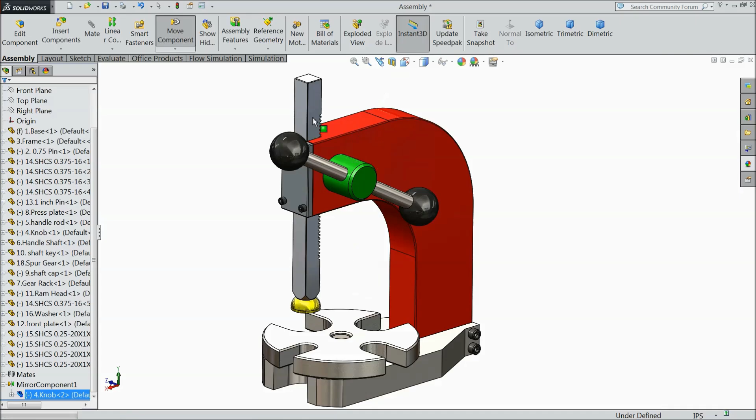Here we will make the first part, the base for our arbor press. We will select the top plane, sketch, draw one construction line and make sure it passes through origin. Select line, connect with this, exit. Now we will assign the dimension.

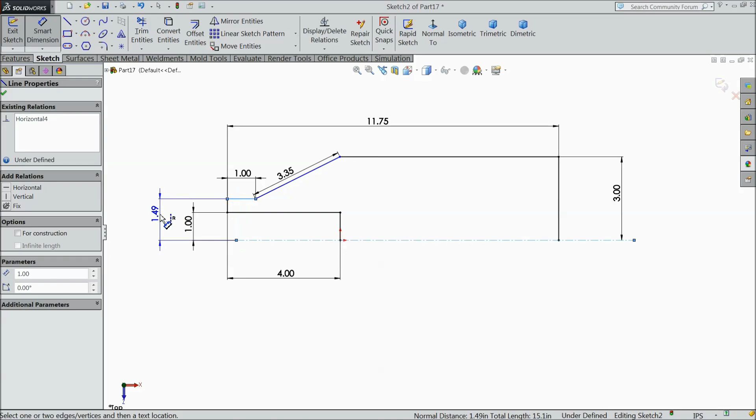Our dimensions are in inches: make 1 inch, 4 inch, 3.35 inch, and the distance from here to one end 11.75 inch, and the distance from here to this line 3 inch, and the distance from this point 1 inch, and this distance 1.5 inch.

Okay, now select circle and draw one circle here. Select a line, connect with this line, exit. Now choose trim entities and trim this portion.

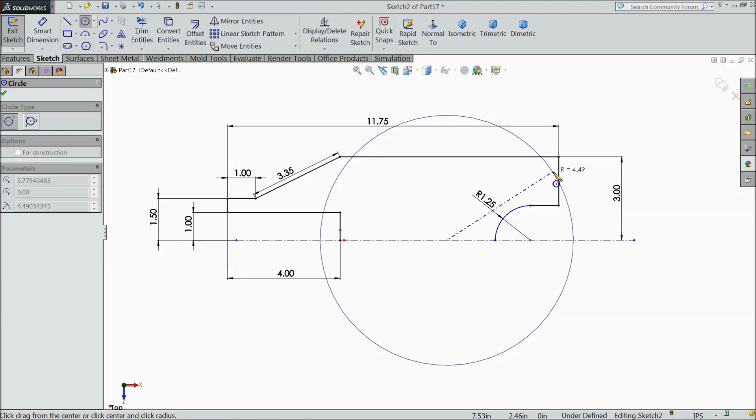Select trim entity and delete this line also here. Okay, now select circle and draw one more big circle, or cancel it and choose here center point arc. Now draw an arc from here, exit. Now assign dimension: the gap between these two 2.5 inch, and keep the radius 4 inch.

Now trim this outer part. That's it. Now select all the geometry, select here mirror and select this line, and we want to make it mirror, so select OK. Now this body is going to be mirrored.

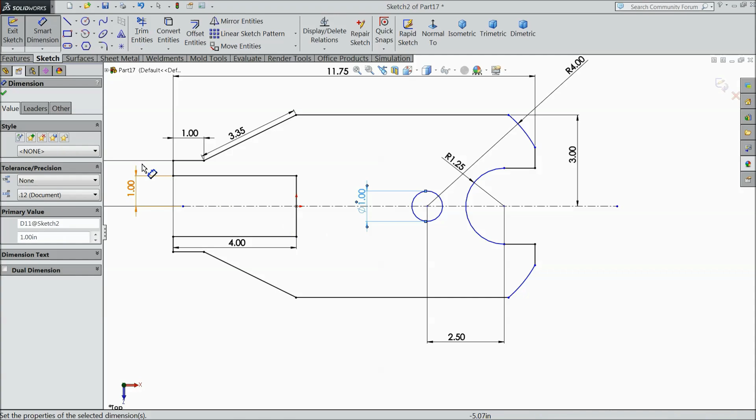Select circle and draw one circle here and make the diameter 1 inch. Now this distance from here is 1 inch. Now our geometry is fully defined. Select extruded boss and extrude up to 1.5 inch.

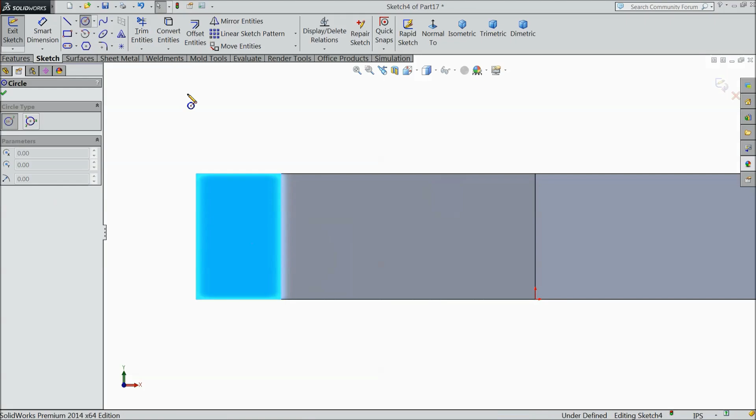Now select this face, sketch normal, and here we want to create some circles. First draw a center line. Now let's assign this circle: 0.35 inch, and the distance from here 0.5 inch, and the diameter keep 3/8 inch.

Select mirror entity and mirror this circle about this construction line. Now select extruded cut and select here through all. See. We will select some chamfer, 0.01, select this face, this face.

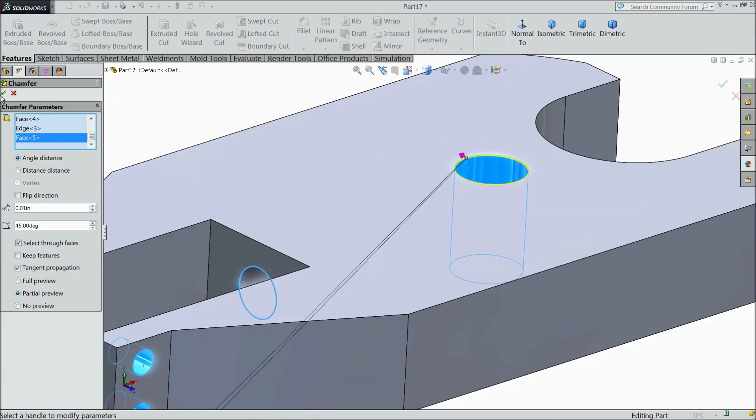Okay, now our first part is ready, this is the arbor press base. We will assign some material, let's do it, brushed steel.

Now save as. Go to desktop and create a new folder and name it arbor press. Arbor press machine, and save as first part base. Okay, let's go for the next part.

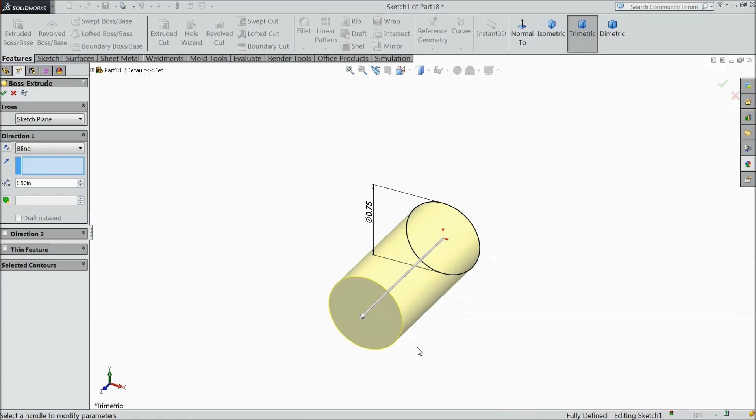Now we will sketch a 0.75 inch pin. We will select front plane, sketch, and draw a circle and keep the diameter 0.75 inch. Extrude it up to 1.5 inch, and make chamfer 0.05 inch and select both ends. Let's assign polished steel for the whole body. This is the pin for the arbor machine.

Now save as .75 inch pin. Okay, let's move to the next.

Now we will sketch the arbor press frame. Choose front plane, sketch, select a line and start from origin point, now exit. Let's assign the length and height, everything.

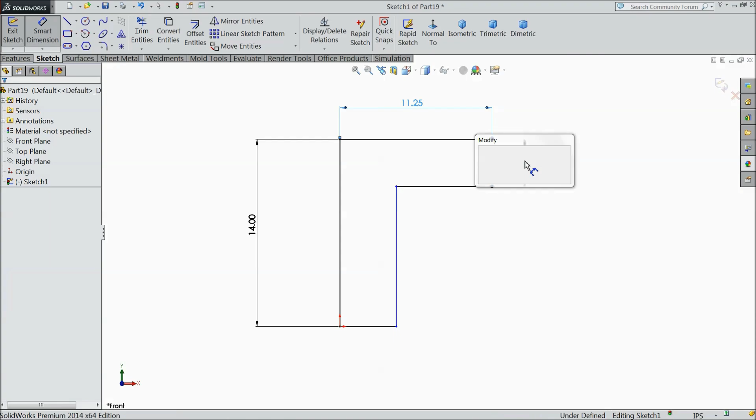Keep 14-inch height, 11.25-inch width, 4-inch width, and here also 4-inch. Now choose fillet, keep radius 6-inch and select this end. Now change to 4-inch and select this end. Select circle.

Draw a circle. Select center point and connect it from midpoint. Exit. Now select this midpoint and make relation horizontal. Keep the diameter of hole 1.63 inch and the distance from here to one end 1.686 inch.

Now select extruded boss and choose here mid plane and extrude up to 2 inch. Now select this face, sketch. First draw a center line.

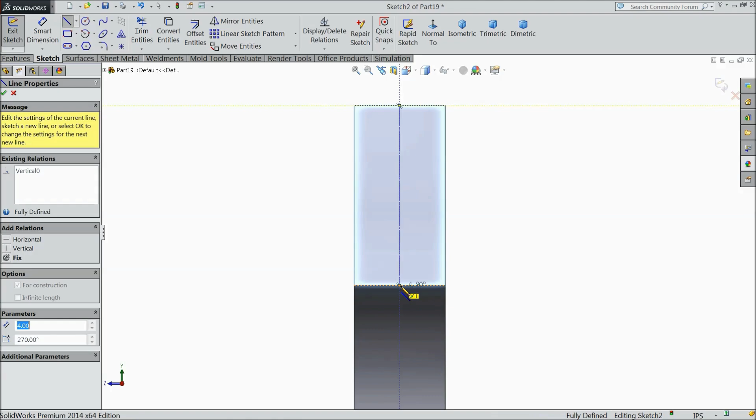Exit. Now choose corner rectangle and draw one rectangle. Exit. Now select these 3 lines and make relation symmetric. Assign the length 0.01 inch and the distance from one end, by default 0.5 inch. Select extruded cut, we want to cut inside up to 1.01 inch. Now see here.

Now we want to create some holes here. Select this face first, normal, and choose hole wizard. Here we want to create some hole, so choose straight tap, inch, and this tapped hole. Here we will select 1/4 into 20 size hole and choose blind and select 0.

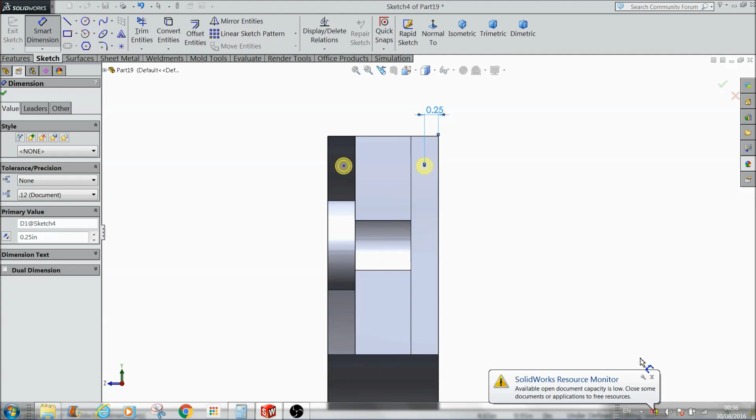Blind inside select 1 inch and this one select 0.75 thread. Okay, now choose position. Here we want... okay, now escape, press escape, assign dimension: 0.25 inch and this height 0.5 inch.

Okay, now the same as here also: 0.25, 0.5 inch. Now select this face, sketch, select center line, exit, and we want to mirror this hole to another direction. So select, sorry, exit.

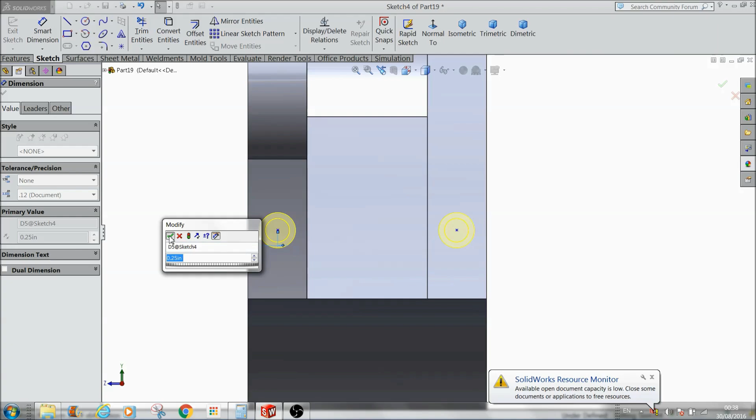Delete this line, or no problem if you can keep it as it is. Mirror it. Or we will do one thing, just delete this line and edit this feature. Now go to location, and draw two more here, press escape. Assign the same dimensions: 0.25 inch, 0.25 inch, 0.5 inch, 0.5 inch.

Select OK. Now see the 4 holes here we created. Now the same as we will create here, select this face, sketch, normal. Only select this face and choose hole wizard. Now choose the same straight tap, inch tab, and here select a little different, 3/8 inch, 3/8 inch 24. Choose through all. Here select through all, position, escape.

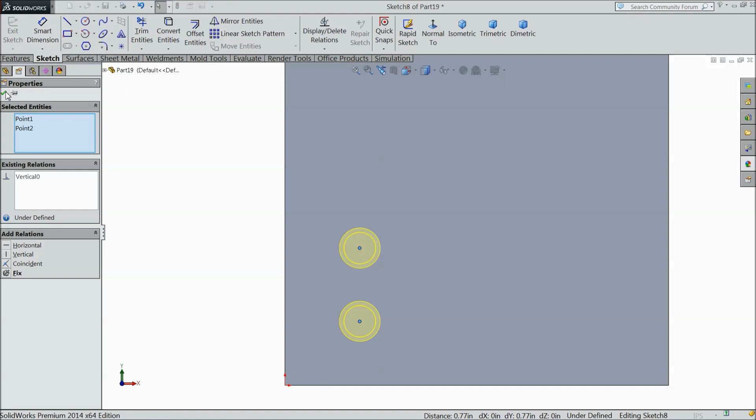Now let's assign dimension. First select this center point and this center point, same vertical. Now assign the distance from this point, 0.5 inch, and the distance from here to here, 0.35 inch, and this distance 0.8 inch. Something went wrong, that's why this pop-up coming. Select OK. Now see the holes created here.

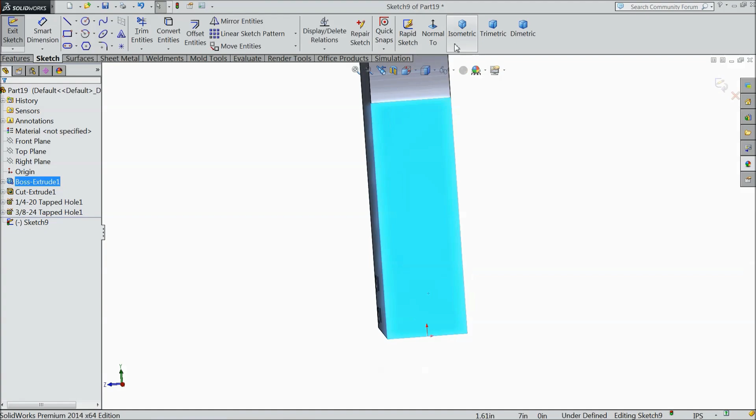Now we want to create a hole here. Select this face, sketch, normal. Select circle and draw a circle. Connect one line with origin point. Select this line and make sure it is vertical. 0.75 inch, and the distance from bottom line 0.75 inch. Select extruded cut up to inside 0.75 inch.

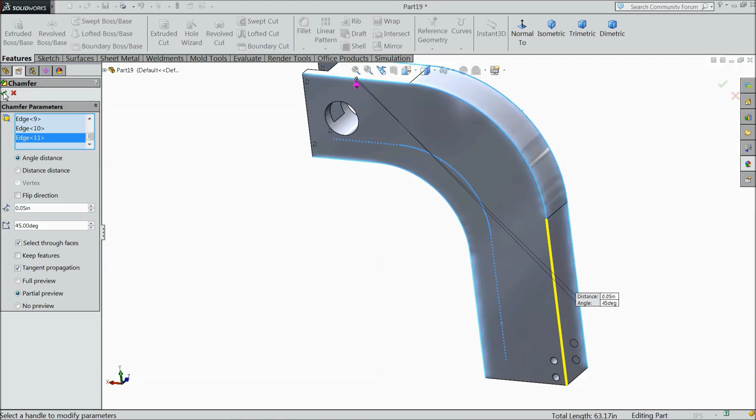Okay. Now choose chamfer, select 0.05 inch and select this face, this face. The same as opposite direction. Select OK. Now this is the frame for arbor press. Let's assign the color. Select the body. OK. Now this is the press. Now save as frame. Okay, let's move for the next part.

Now the next part is handle knob. So choose front plane and draw a circle. Actually select center point arc and draw a half circle. Exit. Choose line and connect it and assign the radius 1 inch. Select revolve boss base and select this line as an axis.

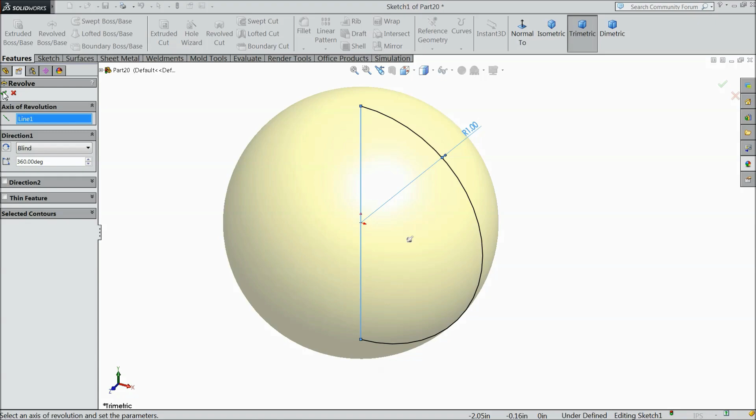Okay. Now again choose front plane and we want to create a plane, so select this upper face. It will be tangent to this face. Now select this plane, sketch, and draw a circle here and keep the diameter 0.75 inch. Okay, and extrude up to inside 0.75 inch. Now hide this plane. Now we will assign black high gloss plastic for this knob. Now save as knob.

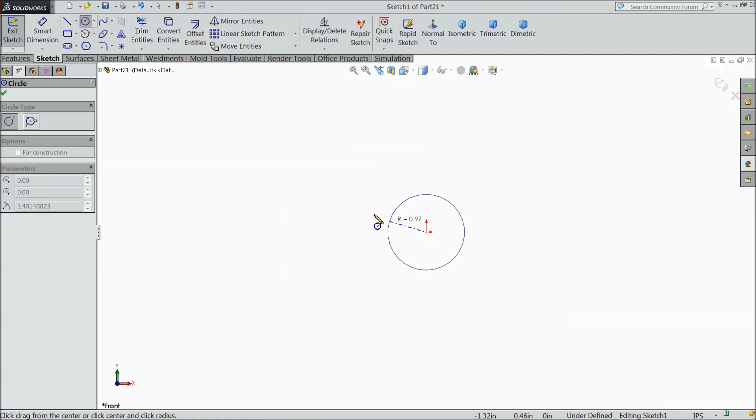Let's move for next part, handle. Let's make handle rod. So choose front plane, sketch, and for rod create a circle and keep the diameter 0.75 inch. Okay, and let's extrude and choose mid plane and we want a 10-inch long rod. Okay. Now save this rod. We will assign some metal finish. Okay, polished steel or brushed steel, better. Now save as part number 5, handle rod.

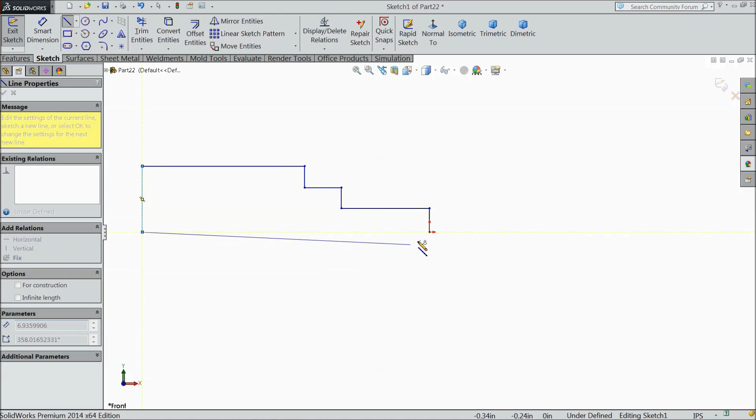Okay, let's move for the next part. Now we will make handle shaft. So choose front plane, sketch, select a line and start from origin point. And connect it again up to origin, exit. Now let's assign the height and width everything. Make 1 inch, 2 inch, and this 0.51 inch, 1.52 inch. This height 0.375 inch, and this height 0.625 inch. Okay, now our geometry is fully defined, so select revolve boss base.

Okay, now choose chamfer 0.125 inch and select this end. We need one more chamfer 0.05 inch and select this end. You can choose fillet 0.015 and select this inside circle. Okay, now again choose front plane, sketch, and here we want to create a hole, so draw a hole and keep the diameters 0.75 inch, 0.75. Okay.

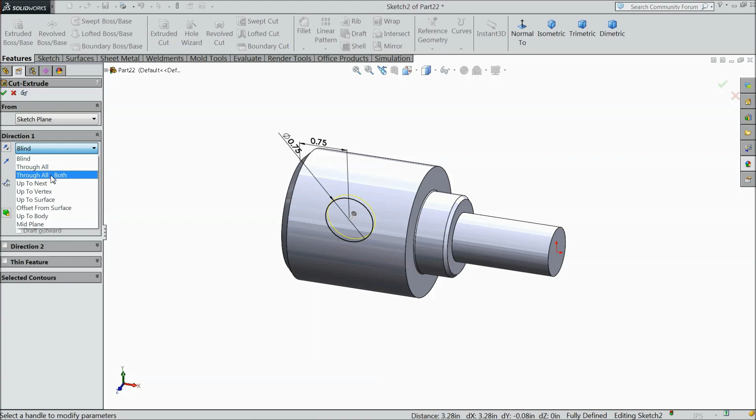Select the hole center point and origin point and make a relation horizontal. Now select extruded cut, and here we will select through all both. See, okay, now the hole is created. Now we will select front plane, choose plane and select this axis, make parallel. Okay, now here we want to create a slotted key, so choose OK.

Now select this plane, sketch, normal. First draw a center line up to this line. Now select here a straight slot, make one slot. Okay, now select this outer line and this slot, this tangent. Now we will define the length, 0.8125 inch, and this radius 3/16 inch. Okay.

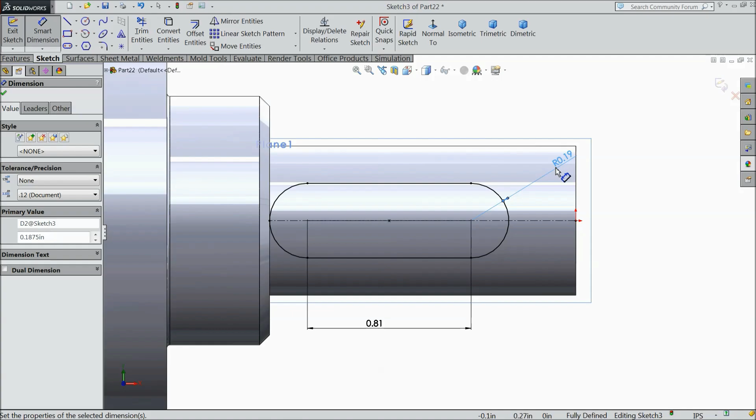Now select extruded cut, 0.9375 and direction 2 also the same, 0.9375 inch. See, it is actually 0.09375 inch. See, you can see it here. Okay, now see this, this is actually slot for key. Now choose fillet 0.015 and select this circle. Okay, now hide this plane and we will assign some color.

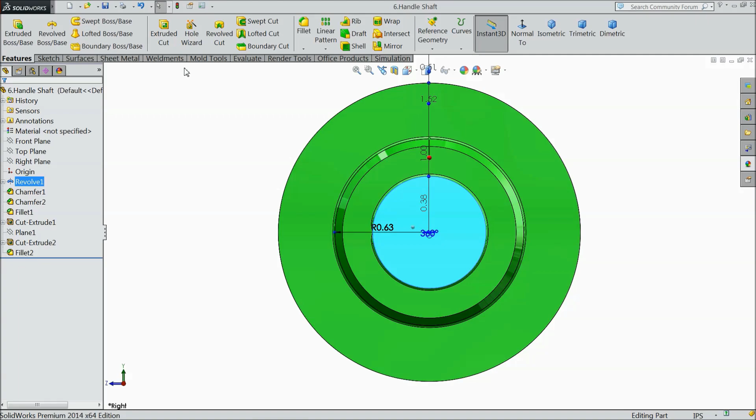We will do some editing here on this extruded cut. Edit, select this radius, and divide it by 2. Exit. Now see, this is our small slot, not that big. Now save as.

Now our handle shaft is perfect. Let's move on to the next part.

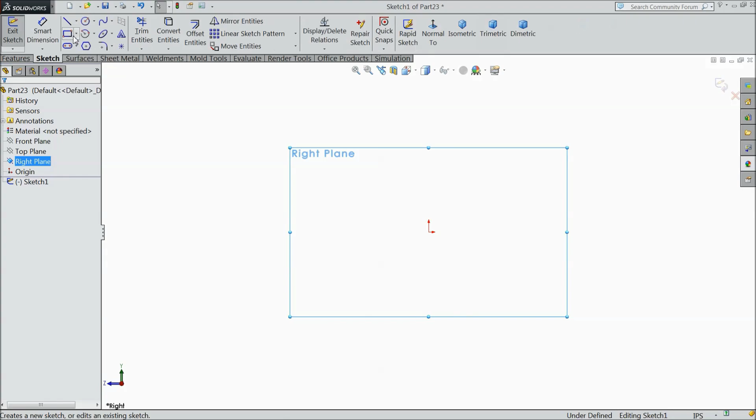Now we will sketch the gear rack. Choose right plane, sketch, select center rectangle and draw one rectangle, keeping length, height and width 1 by 1 inch. Select extruded boss, and we want length up to 10 inch.

Select OK. Now choose chamfer, 0.03, and select all 4 faces. Okay.

Now select this face, sketch normal. Here we will create some gear teeth.

Choose a line and connect up to here. Select center line, exit. Now select these 3 lines and make relation symmetric.

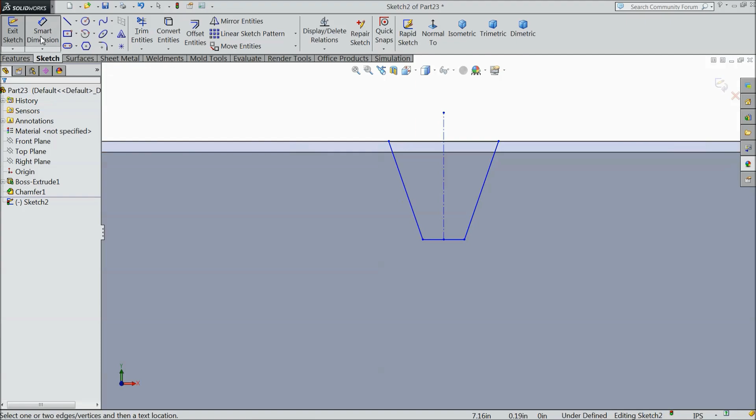Now let's assign some dimensions. Height, make 0.1416, angle 14.5 degree. Okay.

Choose radius 0.02 and select this end and this end. Okay, now this is selected.

Now geometry is not fully defined, so we will add some more relation. This point to this point, make sure it is horizontal. Now let's assign the gap.

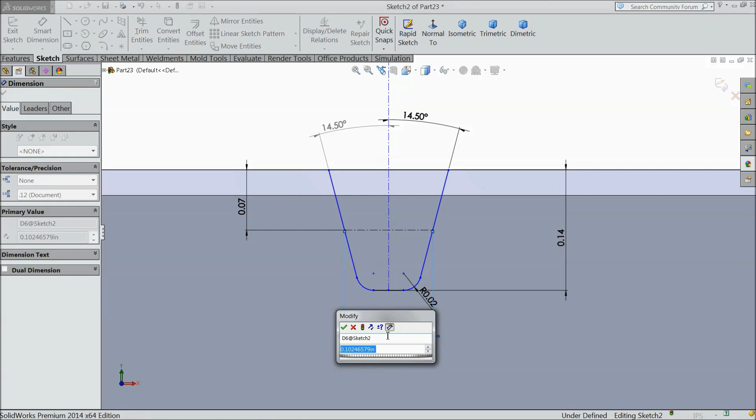Zero point 0.0708, and the length keep 0.1079 inch. Select OK.

Now assign the distance from here to the last point, keep 2 inch. Now our geometry is fully defined.

Select extruded cut and choose through all. See here, okay.

Now select this last cutout and choose linear pattern. Select this as an axis. Assign the distance 0.19635 inch and total 41 number of threads we want.

See, there is a small gap between two threads. Okay.

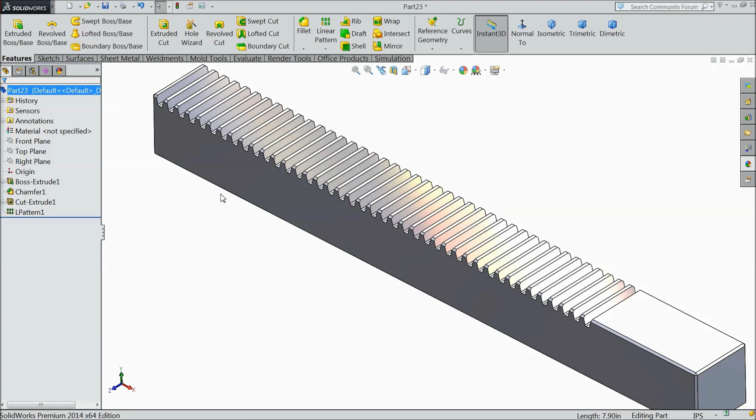Now we will do one, then select this face, sketch, only select this face. Here we want to make some hole.

Go to hole wizard, choose hole, fractional drill size 9/16, and blind keep 1 inch, select midpoint. Okay. Now see, the hole is created here.

We will do one more editing. We will just increase the length here, up to 12 inch. See, okay.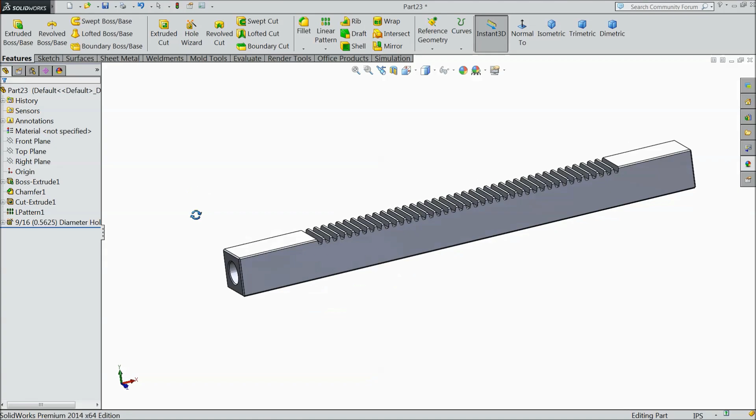Now that's okay, fine. Now select this face, normal. No, select top face, normal, hole wizard.

Choose straight slot and tapped hole and size 1/4 20 inch. Go down, and end condition choose up to next.

Select position, make sure it is parallel to origin point, just escape and choose dimension, 0.5 inch. Select OK.

Now choose front plane, sketch normal, select a line.

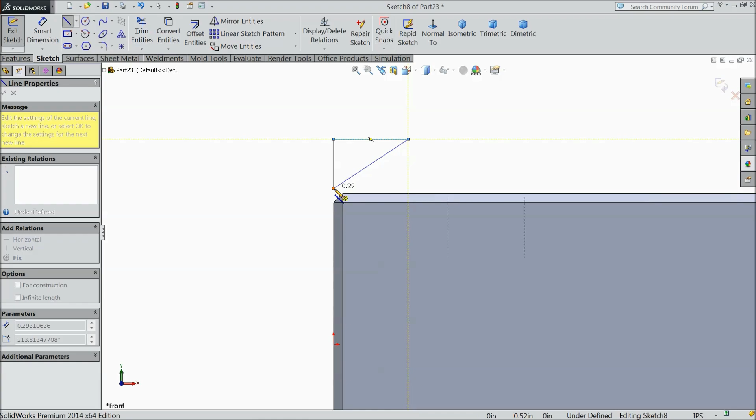Now select this line and this point, or better, drag down, make this relation, draw one center line.

Now assign the angle between these two lines, 30 degree, 0.2 inch. Now select revolve cut, this line selected as an axis. Okay, now see, it is created.

Now just select chromium plating. See, this is the gear rack for the arbor press. The press will move up and down through this gear rack. Now save as gear rack. Okay, let's move on to the next part.

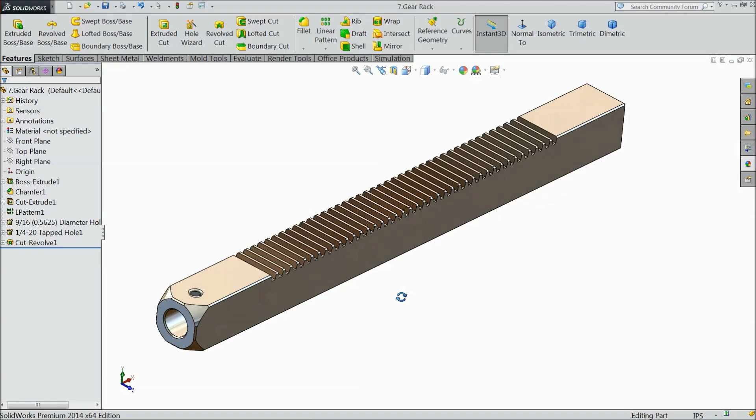The next part is the press plate. So choose top plane and draw two circles. Keep the inside circle as construction geometry. Now assign the diameter, outer diameter 8 inch and inside 5 inch. Okay.

Now select line, construction line. Connect one end to this end. Make sure it is construction geometry, the same as horizontal also.

Now choose circle. In every four corners define different size of circles, each with a different dimension. This circle keep diameter 2.5 inch, 2 inch, another one 1.5 inch, and this last 1 inch.

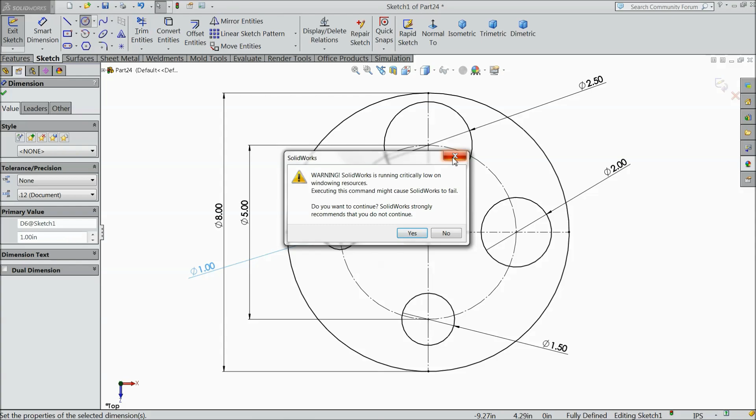Okay, and define, select circle, yes, draw a circle at midpoint, and this also keep 1 inch.

Okay, now choose a line and select this point and connect with it. Choose mirror entity, select this line and mirror about this line.

Okay, now here also draw a horizontal line up to this circle. You can mirror or you can sketch also by line.

Here also we will do the same thing, and the last one at the bottom. Connect with the circle and select both lines and click only mirror entities. Now see, it is automatically connected.

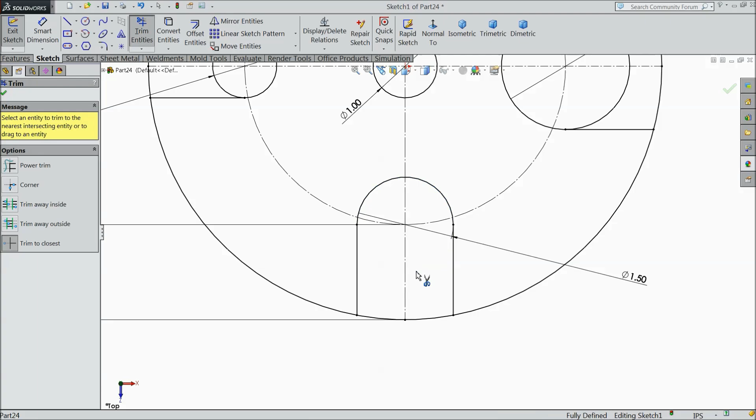Now choose trim entity. We are going to trim all the unnecessary things, we don't want this all. The same as upward. Okay.

That's it. Now select extruded boss and extrude up to 1 inch. Okay.

Now define chamfer. Select upper face and bottom face. Okay.

Now we will assign some material, cast stainless steel. This is the cast stainless steel.

Now save as part number 8, press plate. So this is the press plate. We will see how to assemble it during assembly.

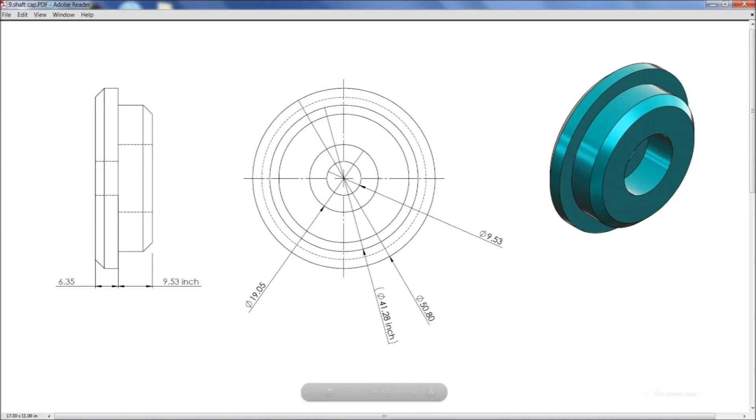The next part is the shaft cap. So choose front plane, sketch, select a line and start just below the origin point.

Exit. Now let's assign the dimension. First draw a center line, a horizontal center line. Make sure it's horizontal.

Now overall length 2 inch, this length 0.375 inch. Now this length defined 0.75 inch, and the last one 1.625 inch.

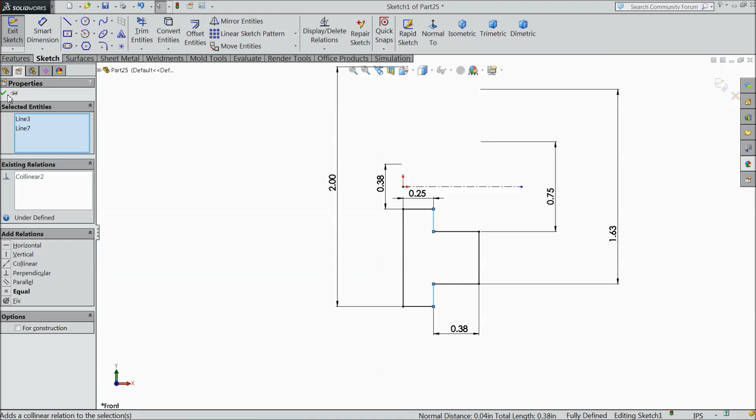0.25 inch, and here bottom 0.375 inch, and the overall length, or cancel it, make relation collinear. Okay, now our geometry is fully defined.

So select revolve boss base. Okay. Assign chamfer. Select this end and the last one.

We will assign polished steel for whole body, and we will assign some different color. Okay. Now save as shaft cap. This is, I think, part number 9.

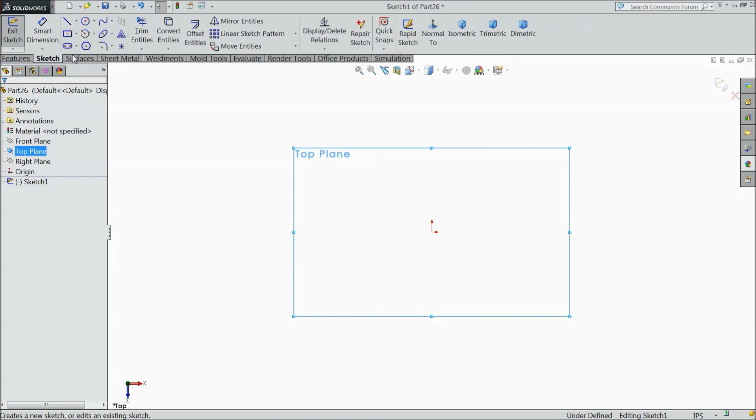Now we will define make shaft key. The next part is shaft key. So choose top plane, sketch, and here select straight slot. Draw a slot horizontal. Now select this line and make sure it is horizontal.

Now define the dimension and assign 4 by 5 inch. And this one decide 3 by 16 inch. No, again divide by 2. That's it.

Now select extruded boss, now extrude it 3 by 16 inch. Now this is better. Okay, now we will assign a small chamfer 0.005 inch. Select top and bottom face. Now select the whole body and define some color. That's it, orange color.

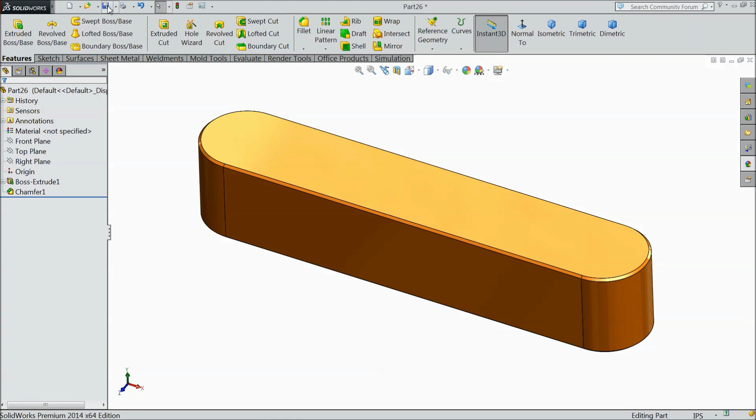Now save this part as a shaft key. Three by 16 inch. Okay, this is the shaft key. Okay, let's move for the next part.

The next part is ram head. So choose front plane, sketch, select line, go back and draw a circle, then a straight line down, and connect with this line.

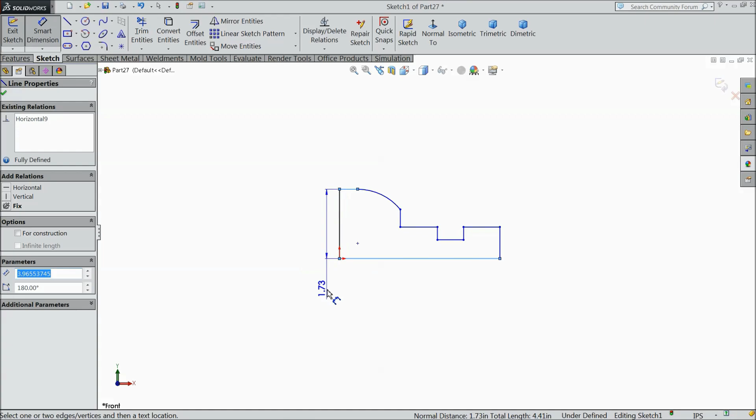Now here we will define some dimensions. Now select the length from here, or cancel it, select. OK. Zero 0.75 inch. Zero 0.263 by 2 inch. This one 0.56, 5625 by 2 inch.

Okay, now this distance 0.625 inch. The radius also 0.625 inch. And the distance from here to this point 1 inch. This distance 0.25 inch, and this one, cancel.

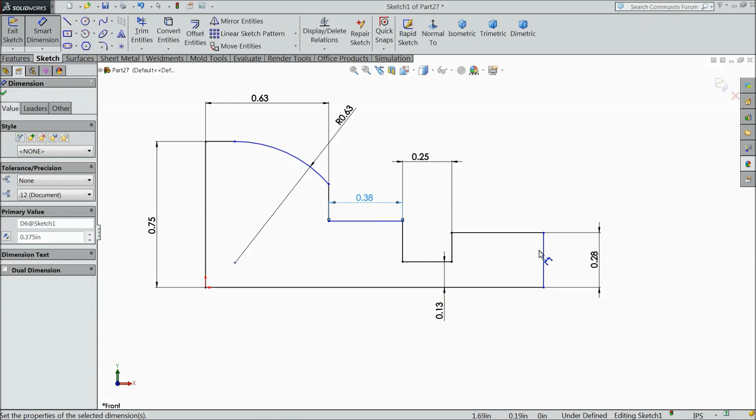This length delete it. Now first define this one 0.375 inch. Now distance from this end to this end 1 inch. Okay, now select this line and make relation collinear. Okay, now define this length 0.125 inch. Okay, now our geometry is fully defined.

So select revolve boss base and select this line as an axis. Choose chamfer, fillet, select this inside circle. Okay. Choose chamfer and select 0.05 and select this face. Okay.

Now we will assign some polished finish material and yellow color. See, it looks a very nice color. So this is the ram head for press machine, arbor press. Now save as ram head. Okay, let's go for the next part.

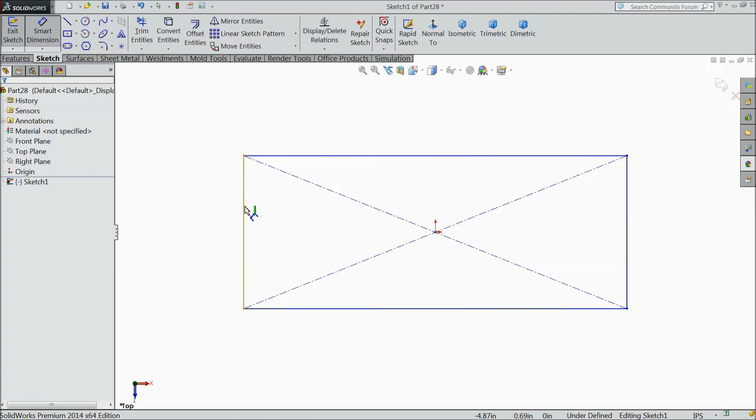The next part is front plate. So choose top plane, sketch, and select here center rectangle. Keep the height 2 inch and 4 inch. Okay, now select extruded boss and extrude up to 3 by 4 inch. Okay.

Now first select chamfer, select this face, and we will select all 4 edges. Okay.

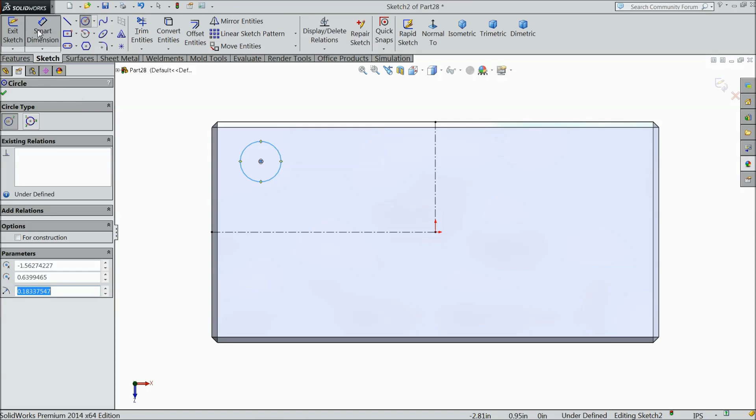Now select top face, sketch, normal, draw one vertical line and one horizontal line, draw a circle here. Now define the distance 0.25 inch, the hole diameter 0.25 inch.

Okay, now choose mirror, okay, again choose mirror, select both the circles and mirror about this line, select OK. Now select extruded cut and select here through all. Okay.

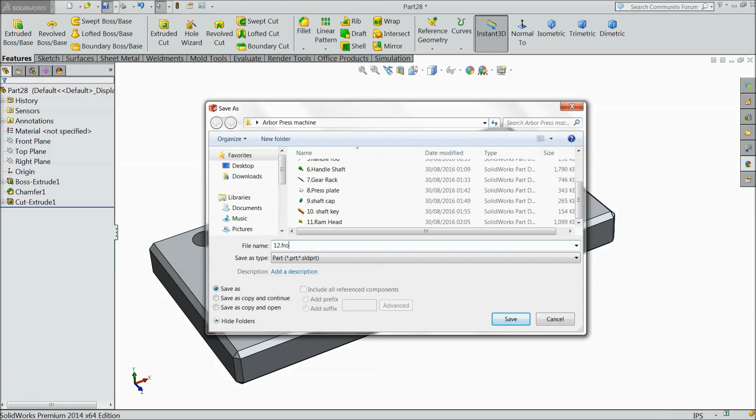Define some little dark color, not much dark, or define some plastic color, polished plastic. Now save as part number 12, front plate. Let's move for the next part.

The next part is 1 inch pin. So front plane, sketch and draw a circle with 1 inch. Okay, and extrude up to 19 by 8 inch. It becomes 2.375 inch.

Okay, define chamfer 0.05 inch, select this face. Okay, now assign steel and define the color black.

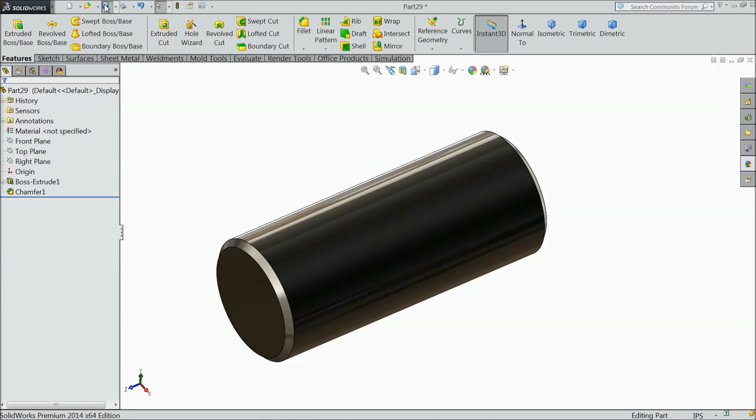Select the whole body. Okay, now this is the 1 inch pin. Save as part number 13, 1 inch pin. Let's move for the next part.

Now we will sketch one screw, socket head screw. So select new and choose assembly. And go to library, design library, and select inch, and in that go to bolts and screw and go down and select here socket head screw, and here select socket head cap screw, just drag it here.

Okay, now a window will pop up and here we have to select 3 by 6... 8 into 16 inch, length keep 1 inch, hexagon, thread length also 1 inch. Select OK. And it will ask you need more than one. No, select cancel it, and just assign a color to this body. OK, now this is hexagon screw.

Now we will save as, select here as a part, and this becomes part number 14. Select here socket hexagon cap screw, 0.375 by 16 inch. Save. OK, now cancel it, don't save.

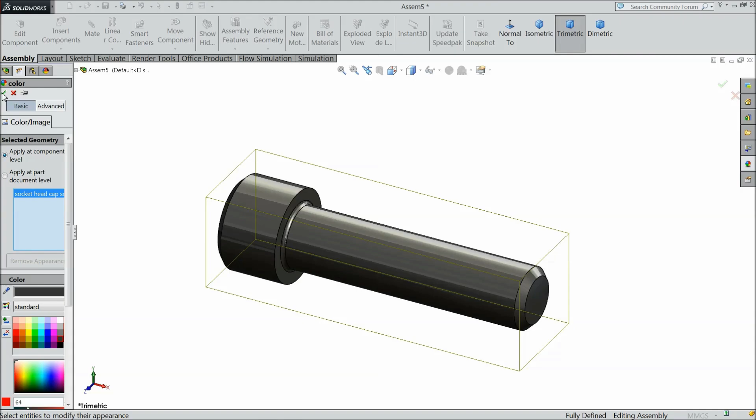Select OK. Select here no, and let's assign dark color to this body. Now this is our screw. Now save this screw, save as a part, socket head cap screw. OK, and make sure this is part number 15.

0.25 by 20. If you want to write all, 1 by 1 inch. Save. OK. Now this is screw, save.

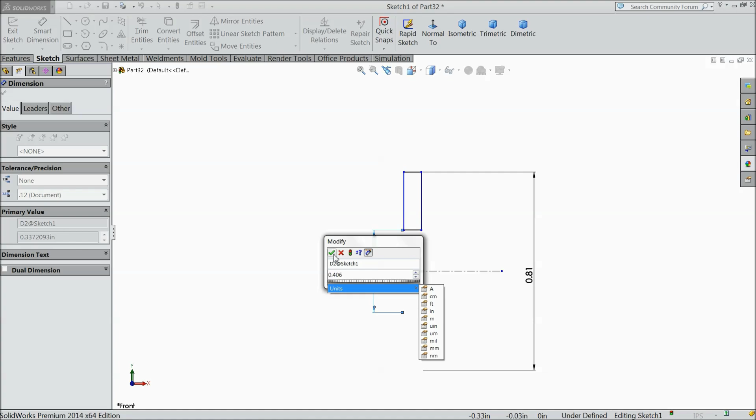Now the next part is washer. Select front plane, sketch, select corner rectangle, and select center line. Make sure this line is vertical. Now let's assign the distance: 0.812 inch, same for the bottom also. Select yes. 0.406 inch, and select this width 0.065 inch. Select this end point and origin point and make a relation vertical. Now our geometry is fully defined.

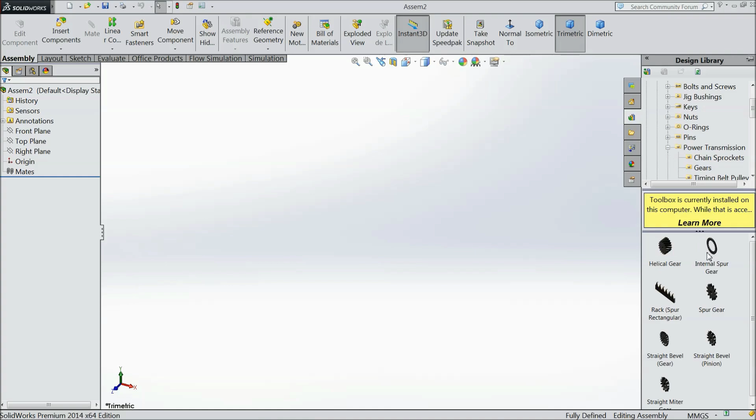So choose assembly. Cancel it, and just go to design library. First select inches, then go to power transmission, gears, and here one option is spur gear. Just drag it here. Select diametral pitch 16, number of teeth 24, pressure angle keep 14.5, face width 1 inch, and the nominal shaft diameter 3/4 inch.

Cancel it. Choose plane. Now we want to do some modification. Select this face, click sketch, normal. Select center line - this is the center point. Choose corner rectangle, up to this circle. Now select this outer line and construction line and make relation symmetric.

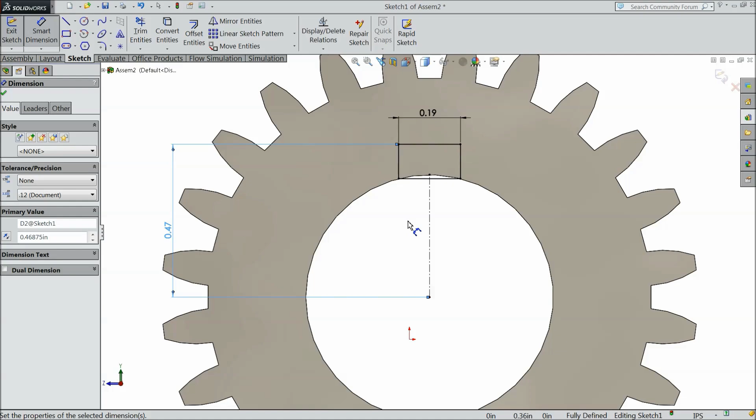Now define the length 0.1875 inch. Now define the distance from midpoint - it should be 0.46875 inch. That's it. Now we want to extrude cut. Select extruded cut and select through all. Now see, it is cut through all.

Now save this gear, arbor press machine, and save as a part. This is the last part, 18 point spur gear. Save. Now this gear we saved as a part, so this geometry is no longer needed, so just cancel and select don't save.

Now let's start the assembly of arbor press. So choose new, select assembly. Now we will browse our first part, base. Once base arrived, we will just do some settings. We will increase the image quality higher. Our sketch is in inches.

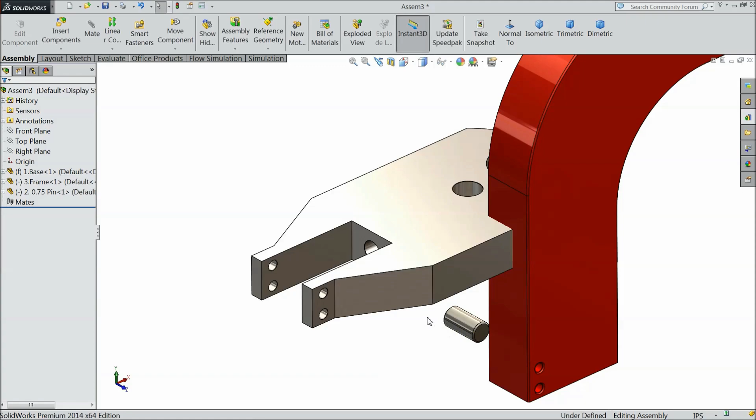Now insert the next component, frame. Insert one more component, 0.75 inch pin.

Now choose mate, select this pin and this hole. Now select this back face and this pin. Now see, it's gone inside. Just drag it here and rotate.

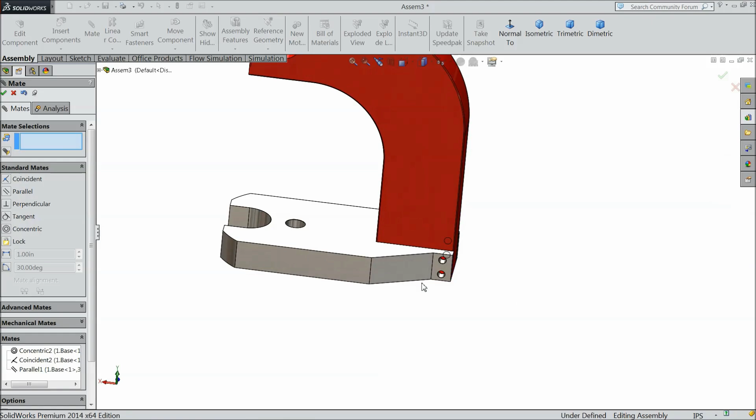Now choose mate. Select this inside hole and this pin. Select this face and this face. Now we need to make - see it is not aligned - so select this face and this face parallel. Now our geometry is aligned with base. Frame and base is fixed.

We will bring some - select this point, nuts and bolt - select this upper face mate and this hole. Cancel it, first drag it here. Now choose mate and this hole. Now hide this, change transparency.

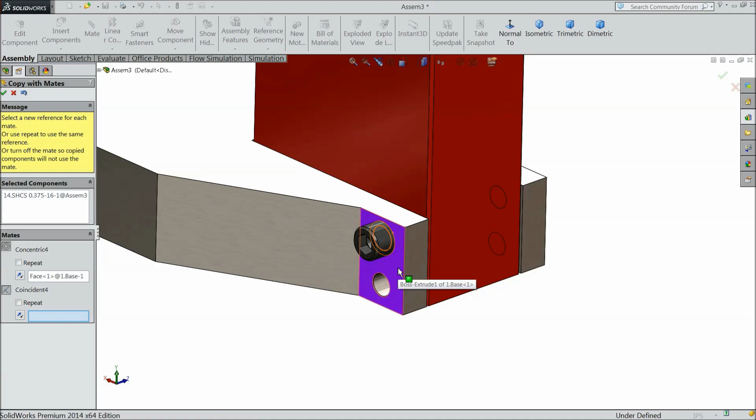Now take it out. Now change transparency. Select this face mate and head face. Now we will just copy mate, copy with mate, select the component and here select the hole and select this face. Then again here also choose this hole, select this face. The same as hole and select this face. Now the 4 screws are fixed here.

Now we will browse our next component, 1 inch pin. Now choose mate, select this hole. Just go to bottom, select this bottom of pin and this base coincident. Now this 1 inch pin is fixed.

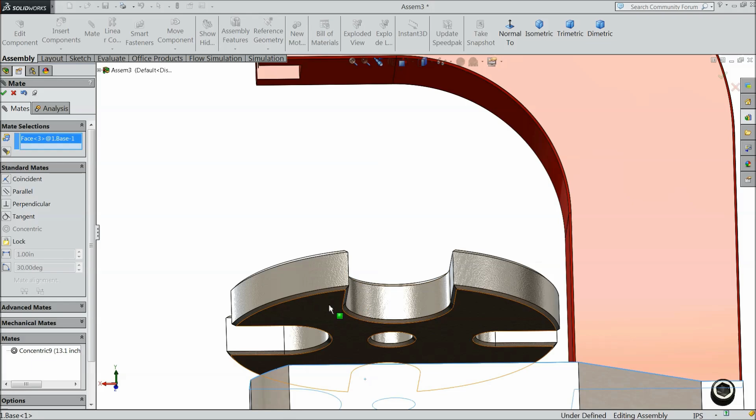Now we will bring the most important part, press plate. Now select this hole of press and this pin and choose concentric relation mate, and we will assign this base and bottom face coincident. Now it is rotating in place, so we will adjust according to our requirement - either we need small or anything, it's up to us, whatever we need. Now this is fixed here.

Now let's browse another component - browse rod and browse the knob. Choose mate, select this rod and select this inside hole and make relation concentric. Now select this inside face and this face, choose mate.

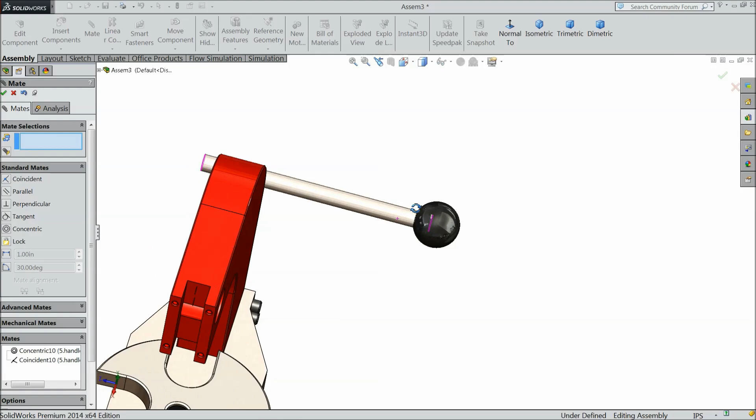Cancel it. Select this front plane of rod and we will try to reverse this knob. Just check where - mirror component - select this knob and select next. See the preview showing here. Now the knobs are fixed.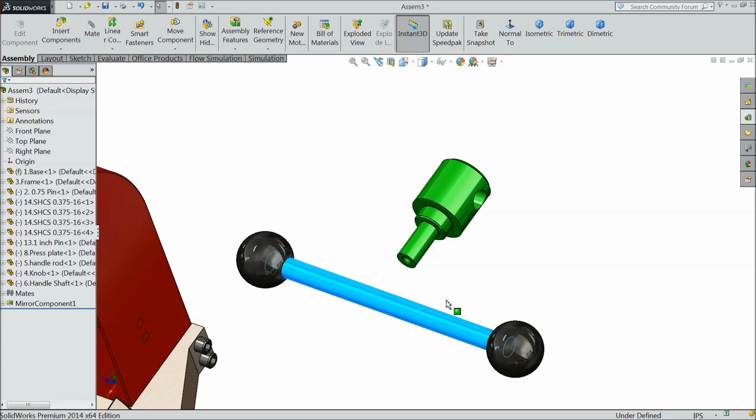Let's insert another component. We will bring handle shaft. Now here we will fix this shaft inside this hole, so select the shaft, mate and this hole. And we will assign some relation - select the front plane of shaft and front plane of handle, select mate. Now see the handle in the center of this shaft. Now just rotate this component. Now insert the next part, shaft key.

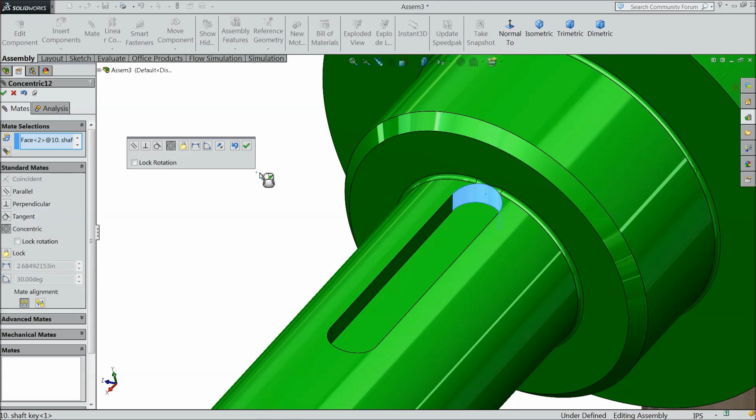Choose mate, select this face and this face, concentric. Now select this bottom face and the bottom face of key. See, it's going to select this face and the wall inside. Okay, now our key is fixed with shaft, handle shaft.

Okay, now we will insert the next component, spur gear. Select this inside hole, mate, the shaft, concentric. And we will select this face and this face. Let's browse inside. Yeah, we can see it's almost the perfect place.

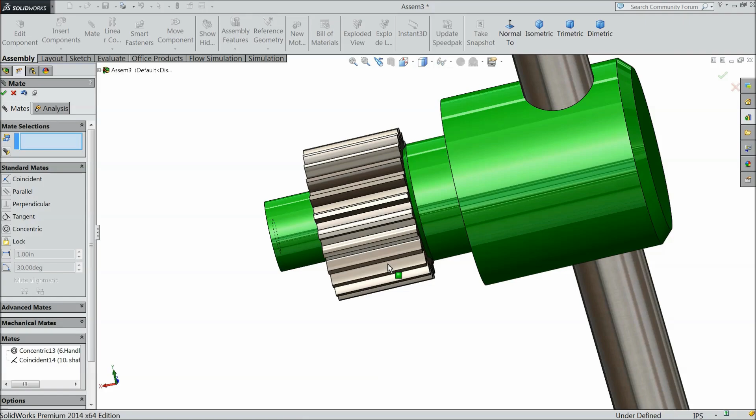Select, okay, now we will insert our another next component. Let's fix it. Select this face, mate, and this gear back face. Okay, now the gear is fixed with this handle and shaft.

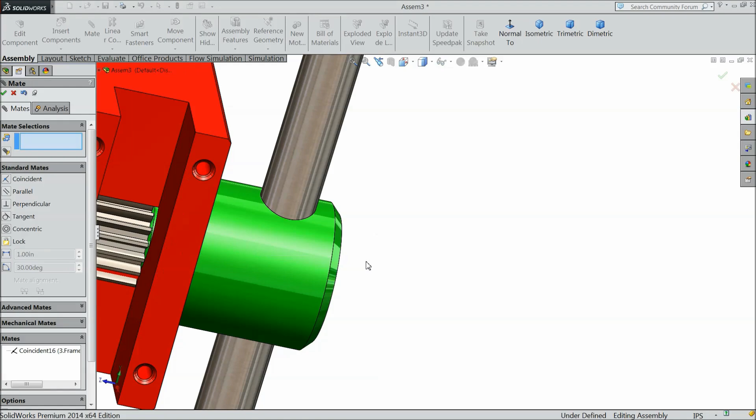Now just rotate it. Okay, now bring it here. Now just select mate, select this face and this face. Now select this hole and this face and make relation concentric.

Now this is in perfect position. See, it is rotating here. Clear. Now it will rotate. Insert next component. Choose shaft cap.

Choose mate. Select this inside shaft and this side concentric. And we have to select this face, outer face, and we want to select inside face. See, it's gone inside. Okay, carefully watch all the mates.

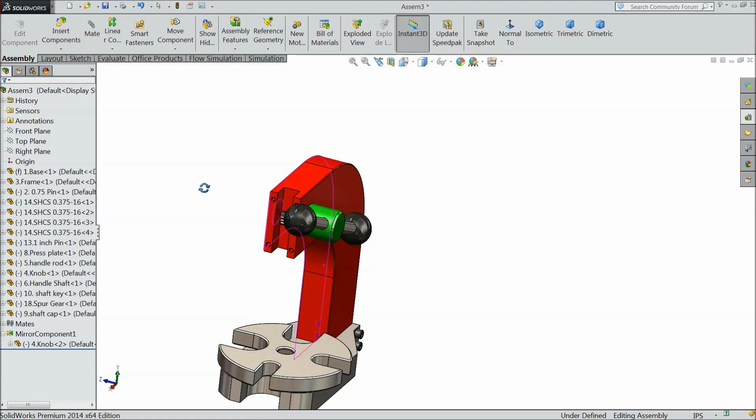It sure will help you. Now insert the next component, gear rack. First just move it, make this hole downward direction.

Okay, choose linear mate and select advanced mate. Select this one side and the second side. Choose width, second side. These two sides selected. Now here this inside select one face and another face. Select OK.

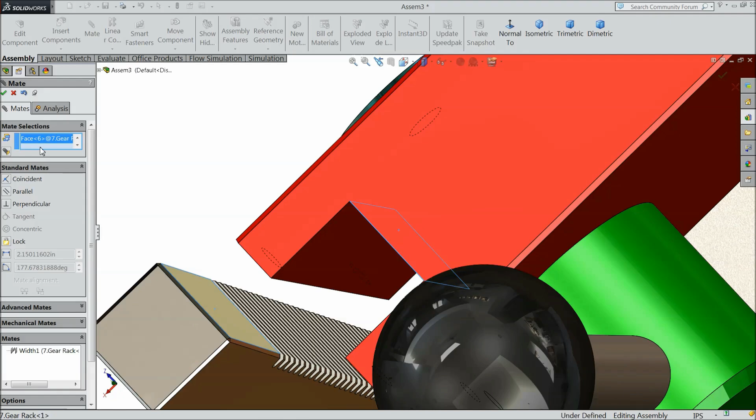Now select this face and this face. Go to mate. Clear. Now here the gears is mated inside.

Select OK. Now we should give a relation here. Now select this frame and click hide component. Okay, now here we have to assign some relation. Go to mechanical, choose rack and pinion.

For rack we have to select one straight line, so we will select this straight line, and for gear we have to select one, this selected. Pinion pitch diameter, okay, 1.15 inch.

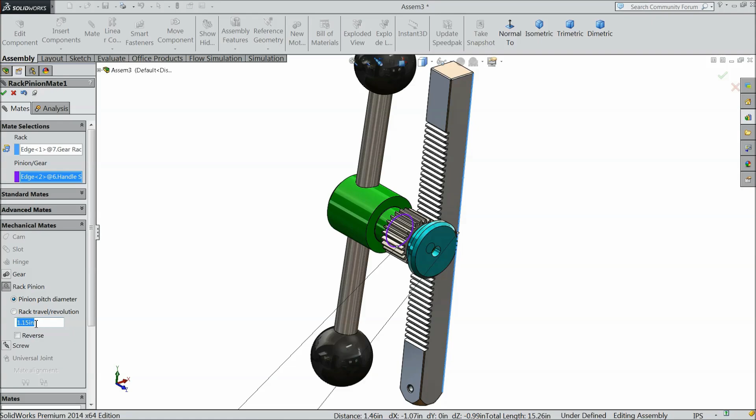Okay, now let's move up and down. See, the rotation is created. You can see the handle is rotating. So now our gear ratio is created.

Now select this show component. Change transparency. Change transparency. Now here we will assign some relation. Go to advanced mate. Select this face and this face. Select here distance.

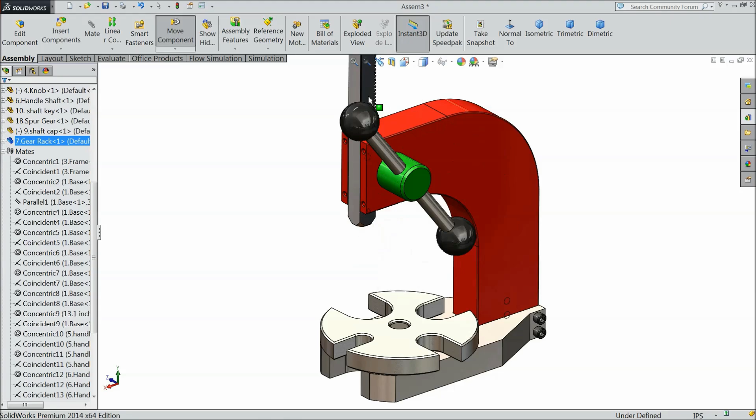Now browse the next component. Arbor press machine, ram head. This ram we will fix in, select this inside hole mate and choose this one, this hole.

Select this face and this face. Okay, now the ram head is fixed with gear mate, gear rack. Now insert washer and 16, this bolt.

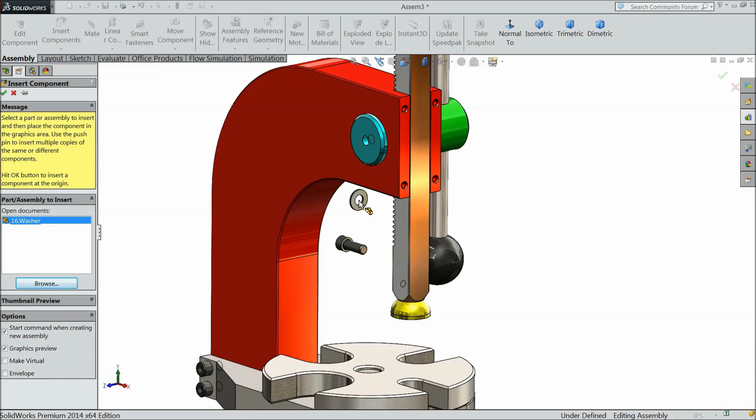Select this face, mate, this face. Okay, this hole and this. Okay, now we will bring inside hole, reverse mate, just hide the body

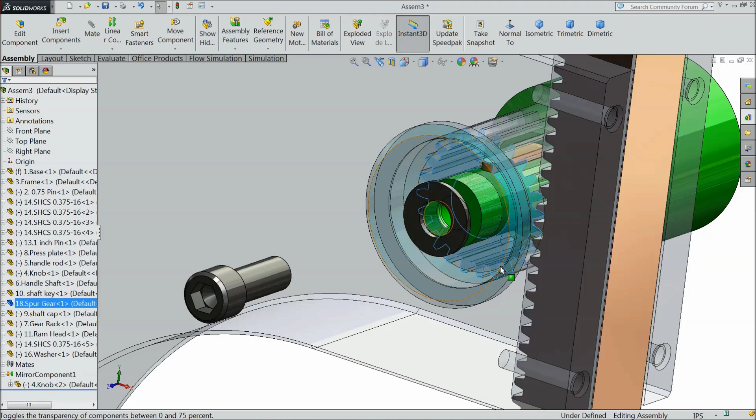and search where this bolt gone. Our bolt gone inside. Drag out. Okay, now select this part, change transparency. That's it. This body also change transparency.

Select this face or choose bolt head face, mate, washer. Okay, now here washer fixed. Okay, now we will bring our next part, front plate.

First rotate this front plate. Okay, select mate, select one hole and this hole. Okay, just take it out. Now again choose this hole and this second hole, mate.

Now select this face and back face, mate here. Now browse the part number 15, 0.25-20 inch bolt.

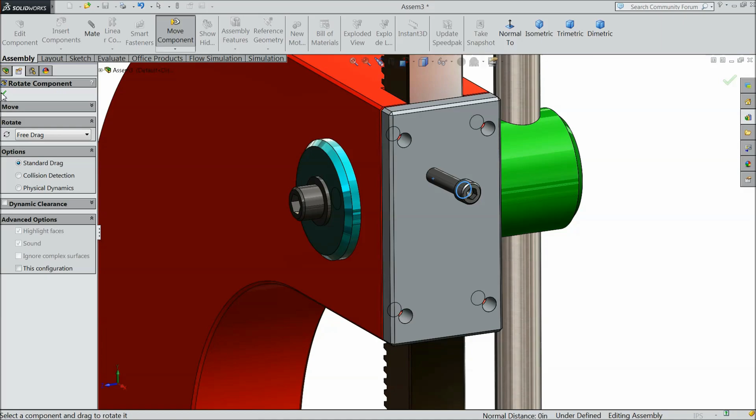First rotate it, it is better. Okay, now choose this hole, mate, and this hole. Okay, back side of head and this plate. Okay, now we will use copy with mates command to paste all in all places.

Copy with mates. Select this component and select first hole and face. Okay, again choose a hole and face. Select OK. Now again choose this hole and the next this face. Okay, now cancel. So now all the 4 bolts are fixed.

So I think all the parts are fixed here. If you change transparency, you can easily see how this arbor press is working. See, this is maximum and minimum. We allocate the maximum and minimum dimension. Select the body, change transparency. So our arbor press is ready.

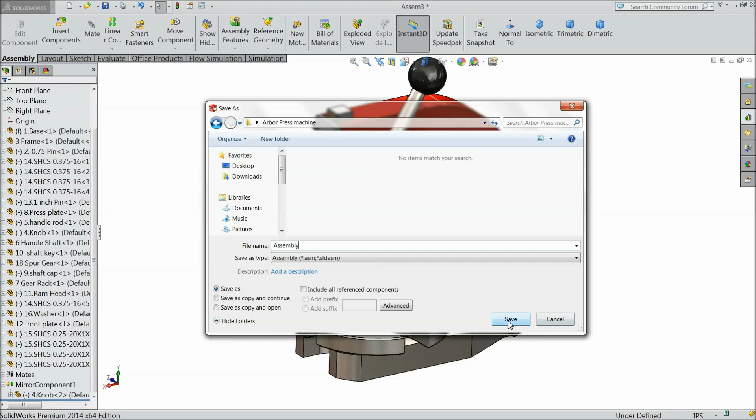Now save as press machine assembly. Now it's saved. Move this handle and see the rack is going up and finish. It has limit for up and down.